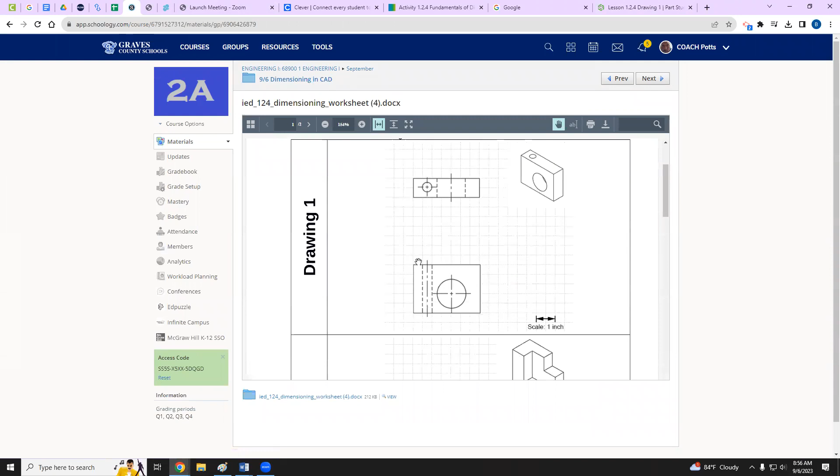Okay guys, real quick I'm going to go through and make this little model. Your assignment, you will be creating this one and dimensioning it out.

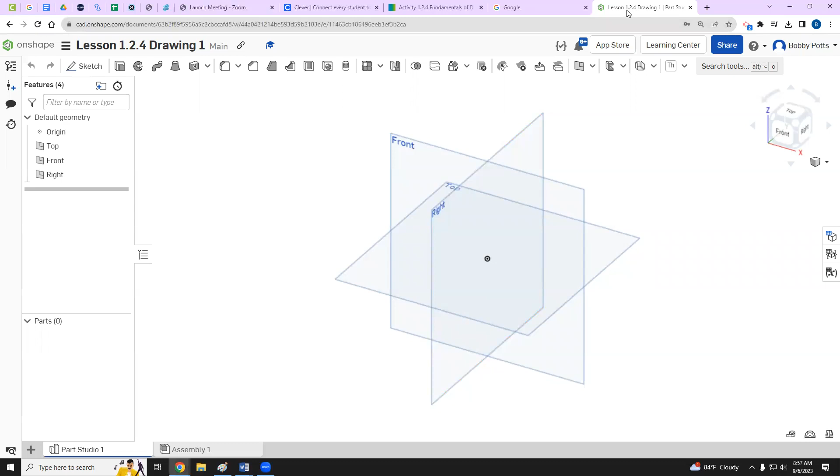But I'm going to create this one for the video, dimension it out, and show you how that's done. So to start, I'm going to do the top view here. This rectangle is 2 inches by 7 inches. So, sketch on my top plane, rectangle, should be 7, 2.

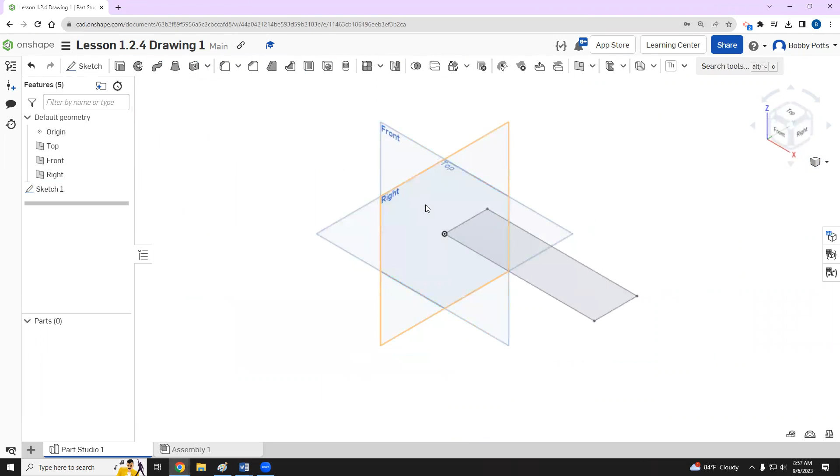Okay, go back to my isometric view. Now this should be extruded to a height of 1, 2, 3, 4, 5 inches. So I'm going to do a quick extrude, 5 inches. Now I've got my main figure.

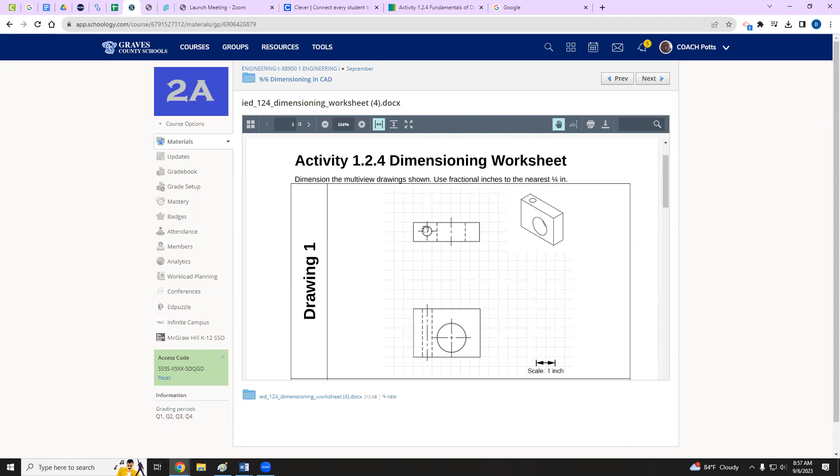Now this figure has a couple features. One, it's got this hole, and you can see by these dotted lines this hole goes all the way through. So I'm going to sketch that. The center of it is 1 inch from the top, and 1.5 inches from there, and then the hole is 1 inch. So I'm going to sketch on the top.

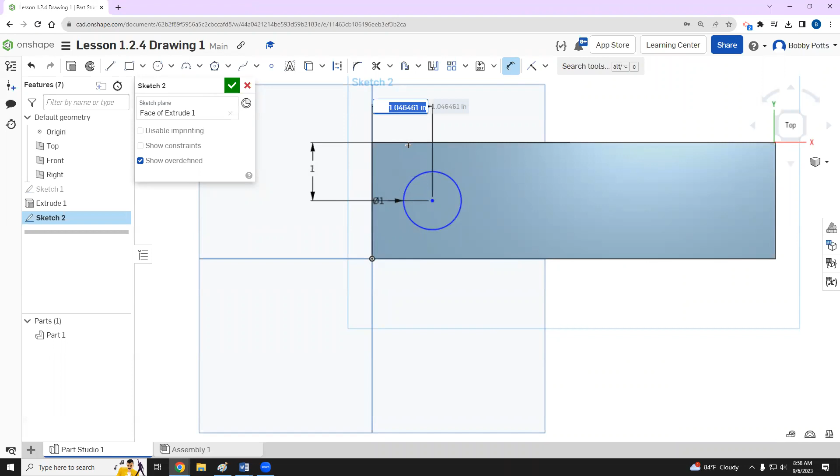I'm just going to place a circle right there. Don't click, just type in 1. We've got a 1 inch circle. Now I want to dimension it. Getting my dimension tool, I click the circle, top edge, and that distance should be 1. I'm going to click the circle and this left edge, and that should be 1.5. Now I've got that feature added.

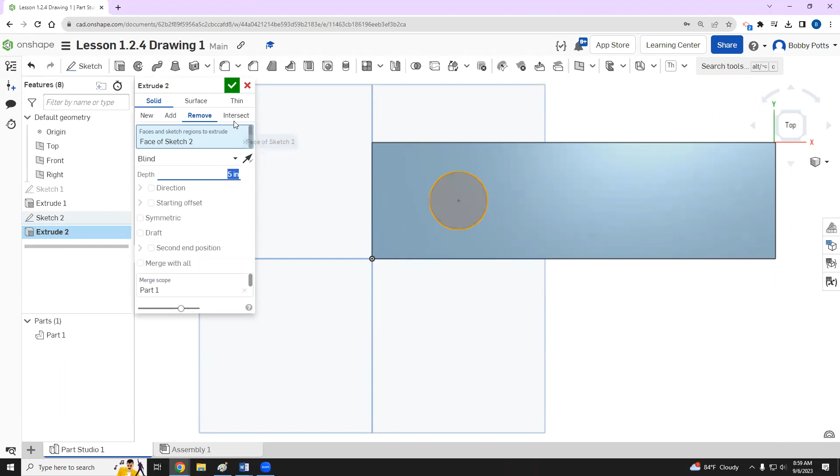It's located, but we have to extrude it. Now instead of adding material, I'm going to remove the material, and its height I believe is 5 inches. So now we've got that feature added.

So if we go to the other one, we've got this circle, and that circle from this edge is that center line. So it's 1, 2, 3, 4 inches from the edge. Its height looks like it's a half, 1, 2, another half, so 3 inches diameter. It's 4 inches from the edge and 2 inches from the bottom.

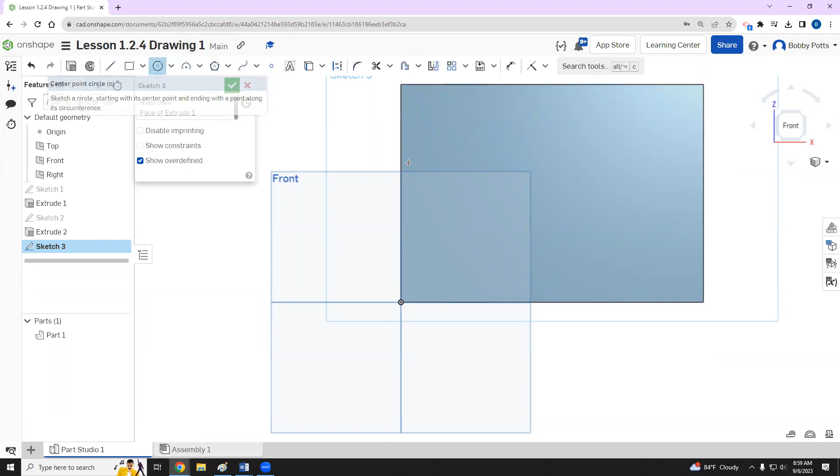So front view, sketch on that face. Place a circle, we said it's a 3 inch circle. And now get my dimension, center from the bottom, delete that, try again. Bottom to the center was 2 inches. And then from that edge was 4 inches.

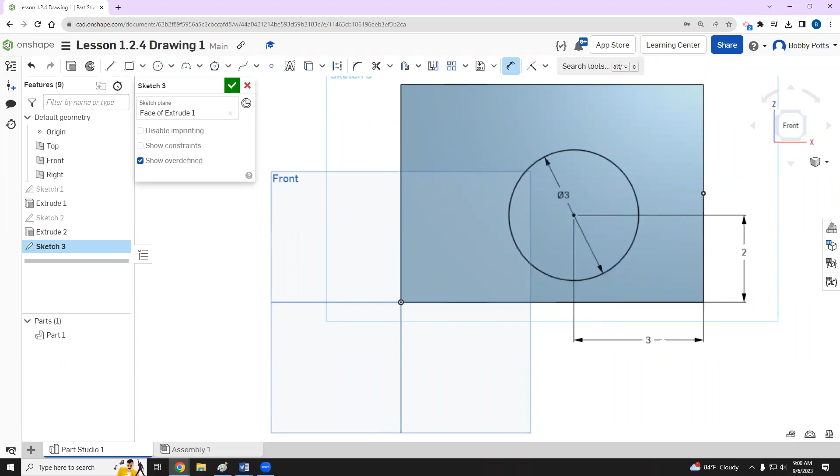So there's a circle. Let's do my extrude. The circle I want to remove, and its thickness should be 2 inches. And now we've got that. So go back to my isometric view. I have now created this model right here.

Now we want to do a drawing. So hit the plus sign, create drawing. And you want to use your drawing that you've created. If you don't see it here, go to created by me. Hopefully it's there. If not, you need to go back to the last video and figure out how to add that. Ask me in class. All right, creating my drawing.

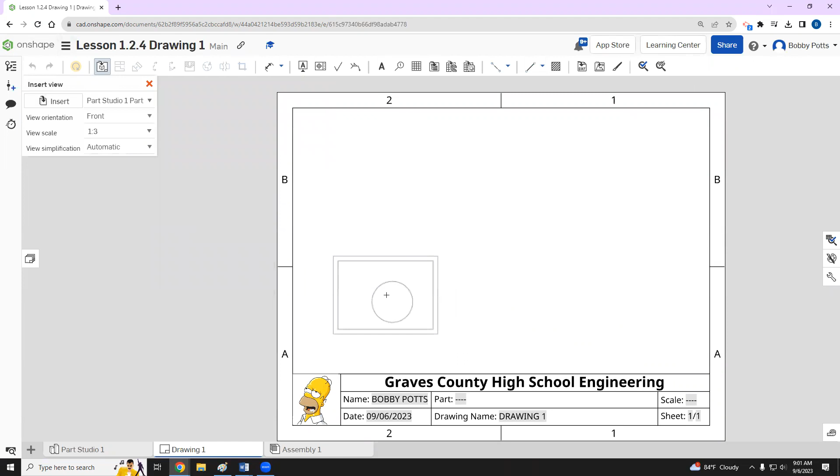There we go. Okay, maybe yours has a drop down where you can go ahead and insert your image. If not, right here, insert view, insert that part. So I'm going to place one in this bottom corner. Notice I didn't get close to this bottom edge or left edge. Go to my top, place it.

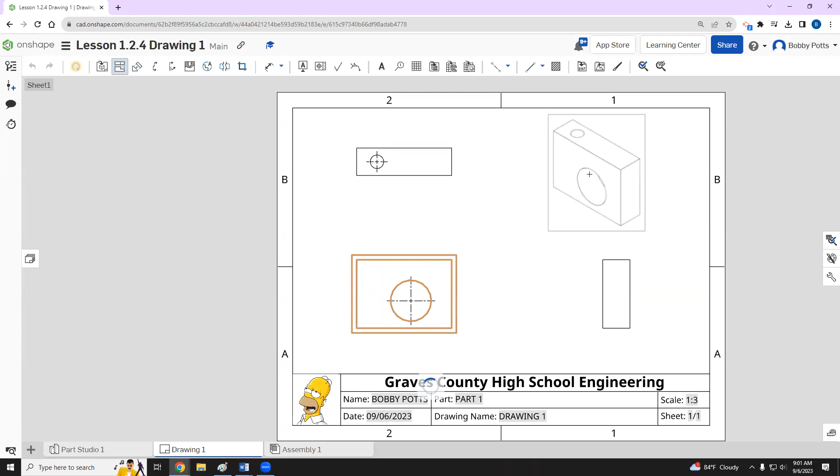Remember, we click our original, drag to the right, place it, click the original, top left, place it. So now it's a matter of dimensioning. My first feature, I need to do the length, width, and height of the main body. So here, dimensioning tool, I'm just going to click this edge.

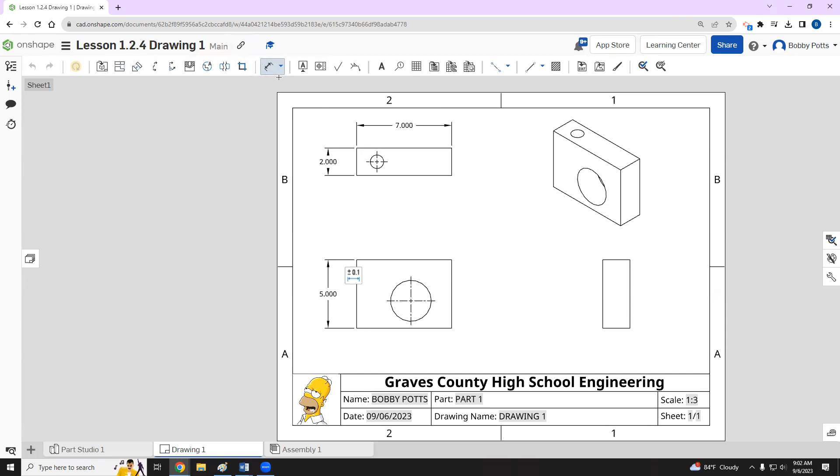Place my dimension. Notice it's centered. Click this edge, place it, and then the height is going to be right here. Other thing I want to do, I'm going to hit escape to deselect that. I want to right click, show hide hidden lines.

Okay, so that shows where this circle is right here. Show hide hidden lines. So if we look back at our dimensioning, we've got this. We've got a center line we need to add. So I'm going to go ahead and add the center line.

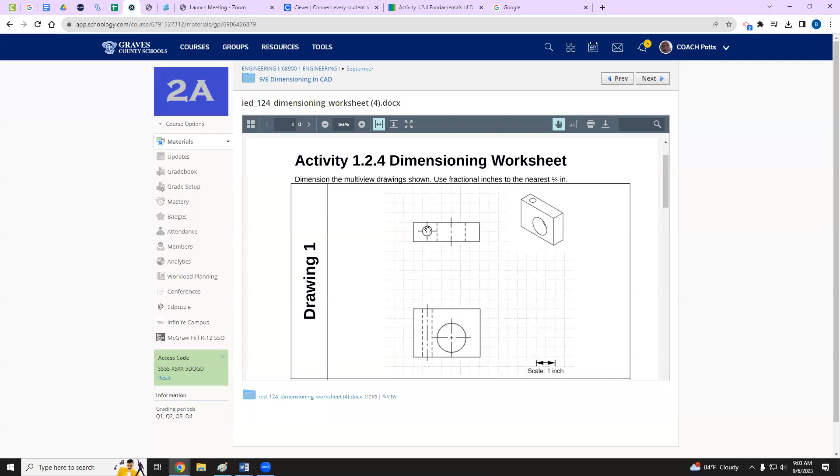So 2-point center line, or let's go edge to edge center line. So click that edge, there we go. And here, click this edge, adds my center. Now, let's go ahead to next feature, which would be this hole right here. So we need a location and a size. Let's start with location.

Get my dimension tool. I'm going to click the center to that left edge, right there, I'm going to drag it out a little. Let's go to this side, click again to place it. We want that center edge from the top. Place it right there.

All right, so that's its location, but now we need the size. So under my dimension, diameter dimension, I'm just going to click the edge of the circle, drag off at an angle. That tells us that its diameter is 1 inch. So for that feature, we've got a size and location.

So now let's go to this one. Go back to my dimension. Let's locate it. So from that left edge, it's 3 inches. From that bottom edge, oh, so we want escape, reselect it, click the center first, then the edge. We're 2 inches away. And now that it's located, we want size, diameter dimension, click the edge, drag off, and there we go. So each feature here, we've got a size and we've got a dimension.

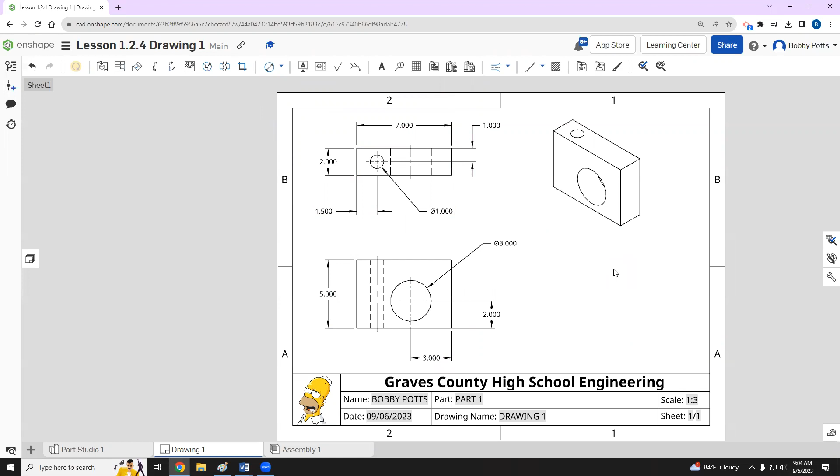Did I use this figure at all? No. So I'm going to hit escape to deselect. I'm going to click that one, delete. We didn't need it. All right, we got all our size and dimensions in this figure, in these two images, and we've got our isometric view.

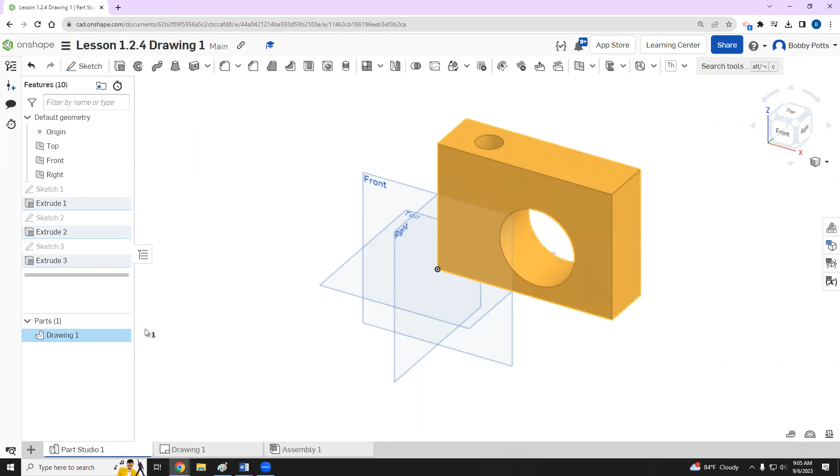Okay, down here, part, I'm going to go back to where I made the part. And I'm going to rename this. Let's call it drawing 1. And remember, you guys are doing the drawing 3. So if I go back to my drawing, I can refresh. And now that part is opened up to drawing 1. Let's rename the drawing. So down here, rename MVD of drawing 1.

And that updates. Notice the scale is 1 to 3. So this is not the actual size. This is 1/3 of the size of the actual figure. And that's it. So I want to do a screenshot, submit that on Schoology. You'll have a good day.